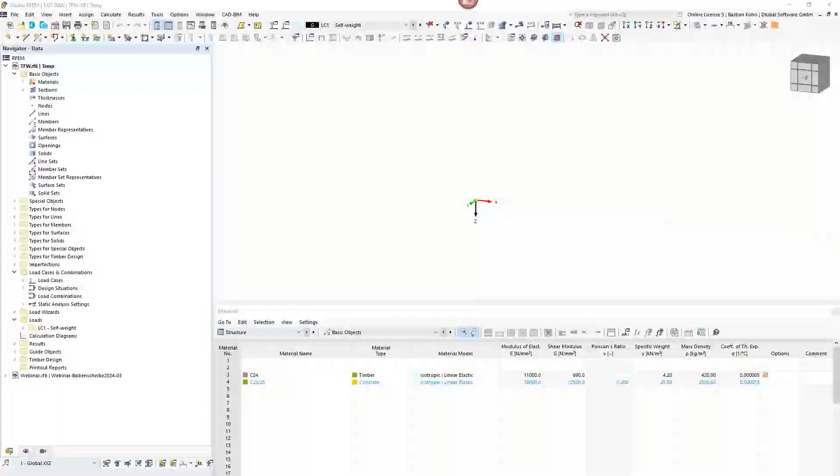Just have to get the right one. This one's the right screen. Oh, I have to click share. Sorry. Yeah, looks quite good.

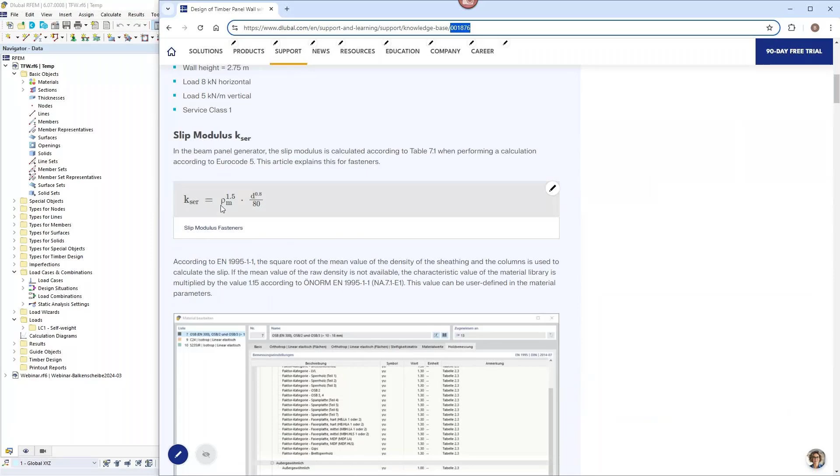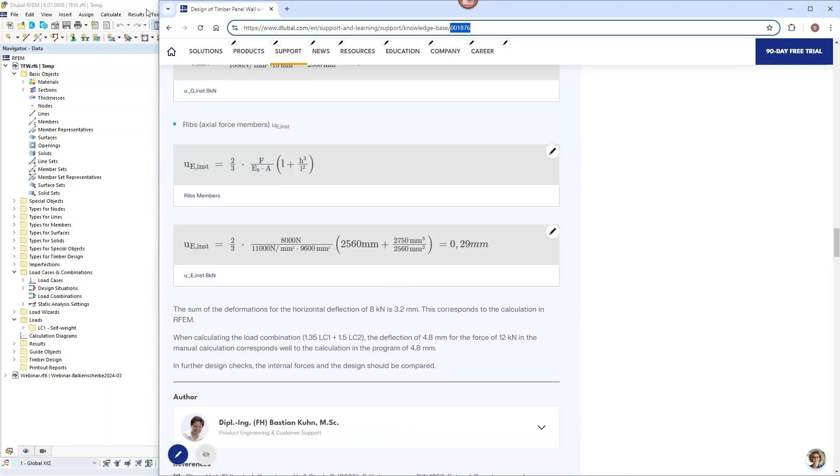Okay, before I start the modeling of this timber frame wall, just as an information for you, my colleague probably will share the link also with you. The model I'm doing here has been analyzed and calculated also by hand on our knowledge base. You can find it by the number 001876. And here you can see the formulas that are lying behind it, and also the deformation. And of course, the inner forces are calculated here with hand formulas or equations. Maybe once I've generated the model, I will take a look back also to the homepage just to show you what we are doing here.

Okay, before we create the model, we have to give a model name, timber frame wall. I will choose type of model 3D here. Then in RFEM 6, one of the advantages compared to RFEM 5 is that you have every design add-on completely integrated into the software, and it's not a separate add-on anymore. It's completely integrated into the software, which has a lot of advantages for speed and also design purposes.

And so I can decide what I want to build or to plan in here, and what we want to do in this first simple structure. I mentioned it already, we will create a beam panel. Therefore, we would need the multi-layer surfaces add-on. We don't need the load wizard. We also don't really need the combination wizard, but it does not matter. And we will do the timber design in the timber design add-on.

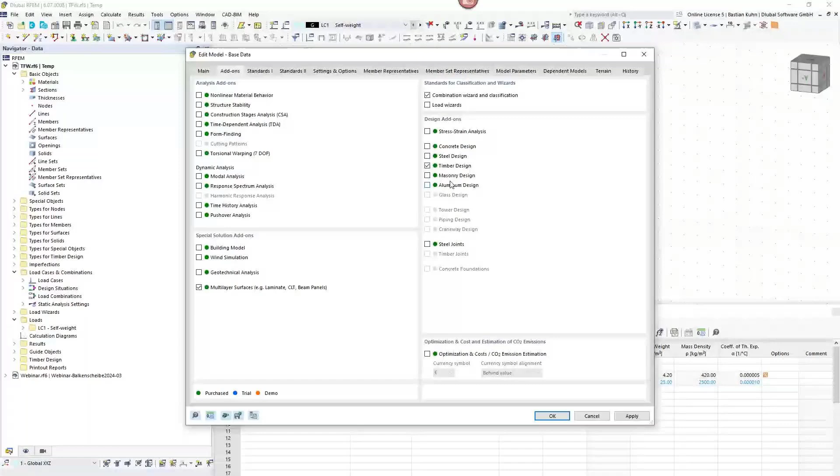Looking at the third register in the basic data, we will have the standards here. We are calculating according to the timber Eurocode, and of course it is also possible to calculate according to American standard, Canadian, and a whole bunch of others, even Chinese is possible for timber design. We will choose timber design with all the national annexes that are available for Europe. What is possible: America, Canada, Switzerland, Italy, because it has some special rules related to Eurocode, but different a little bit. There's Chinese and there's Australian standards as well. Okay, all the other options are not relevant for this

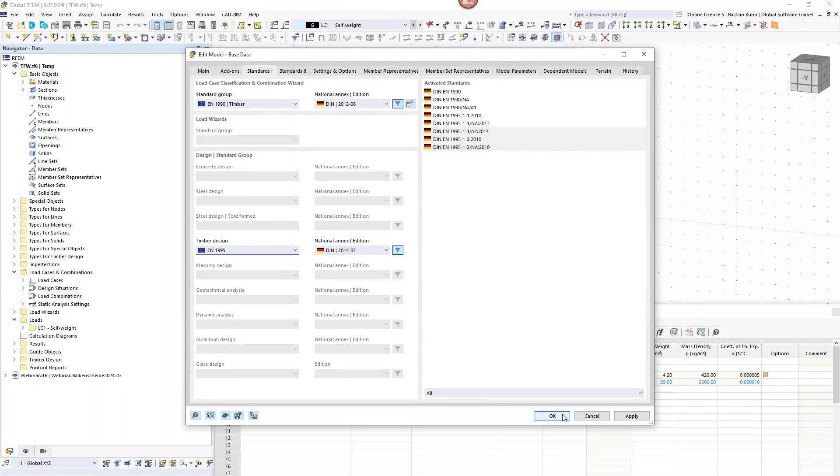quite simple model. Okay, we start and we will create the surface or the wall, and therefore we create a new thickness. For starting, similar as, I don't know if you ever worked with our software, but also when you created a CLT wall or floor, cross-laminated timber, you can start with just a concrete material.

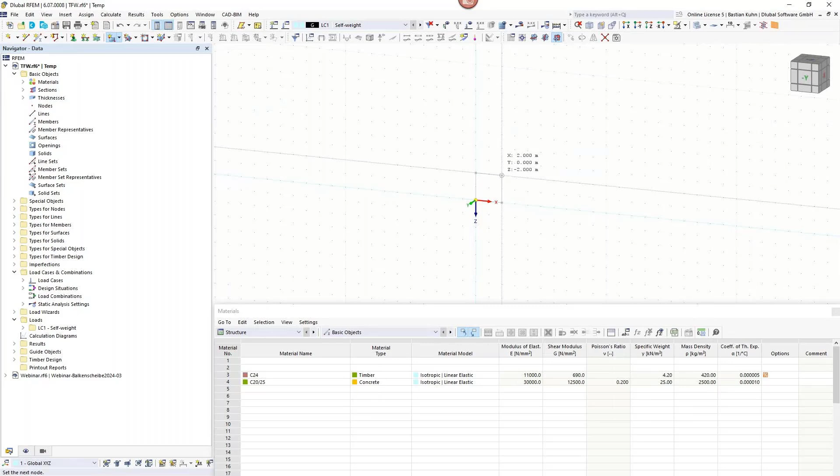That's what I'm doing here. Any kind of thickness, that does not really matter. Just create it just for drawing the structure and how it's going to look like. So it has a size in X direction of minus 2.56 meters. This is now a theoretical example, and I chose this distance of 2.56 meters.

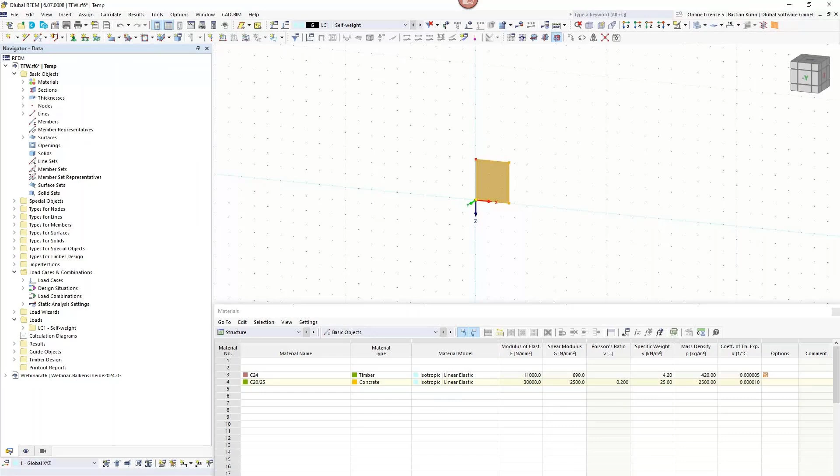I can maybe also add a little dimension line just so that you see it here, maybe in the other area here. Of course, for timber frame walls, you have a standard distance of each beam in the panel of 0.625 meters, so 62.5 centimeters, which is the standard design.

In America, with the inches, it's a little bit different, but once again, we're doing this here according to Eurocode. I will show how to change it also for the relevant parts of American standard, but the main purpose here is Eurocode. And just to get back to the homepage again, here the hand calculations are also based on the Eurocode.

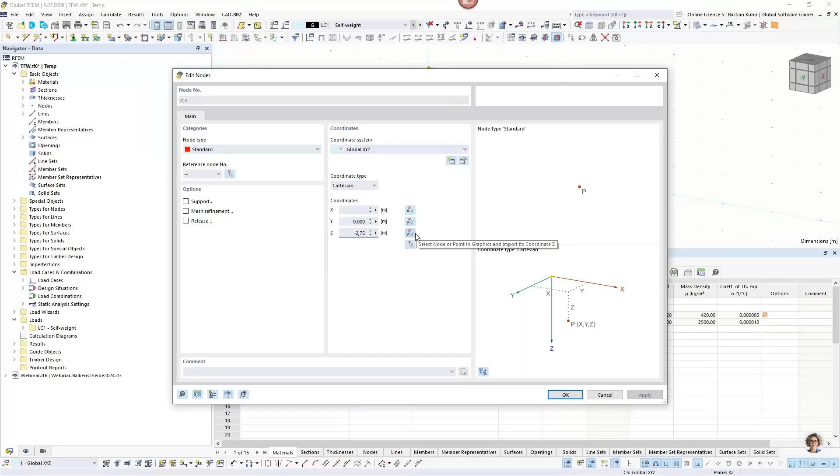Okay, and to see it maybe in this picture, because of the distance here, I get exactly 5 beams side by side in this structure. Okay, just as an explanation if you ask why I chose such a distance here. Okay, I want the height, also a more European standard value, of minus 2.75.

Then I will add supports, and the first support should be not movable in X, Y, and Z direction, and also no turning, because it's in this case a 2D position, and I will put that at the origin in order to keep it statically determined. I will also just move one support on the right side. In the bigger model that I'm going to do just after this simple model, of course, you would do a complete support underneath the wall. That's for sure. It's just for this first example here.

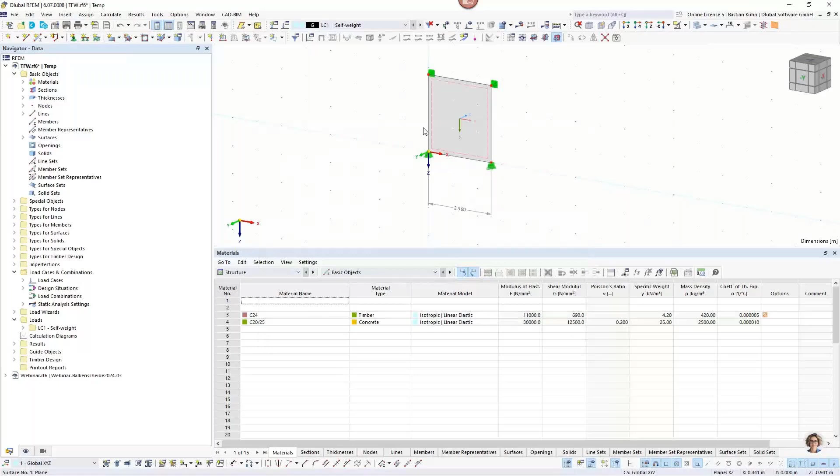So this one is moving, okay, and so that it's not flipping outside of the plane in Y direction, I will define the translational degree of freedom in UY direction. Okay, I will put a line load for the first load case of a value of 5 kilonewton per meter, and go to load cases and combinations and create a new load case for the wind. I deactivated the self weight just so that it can be compared to the calculation by hand.

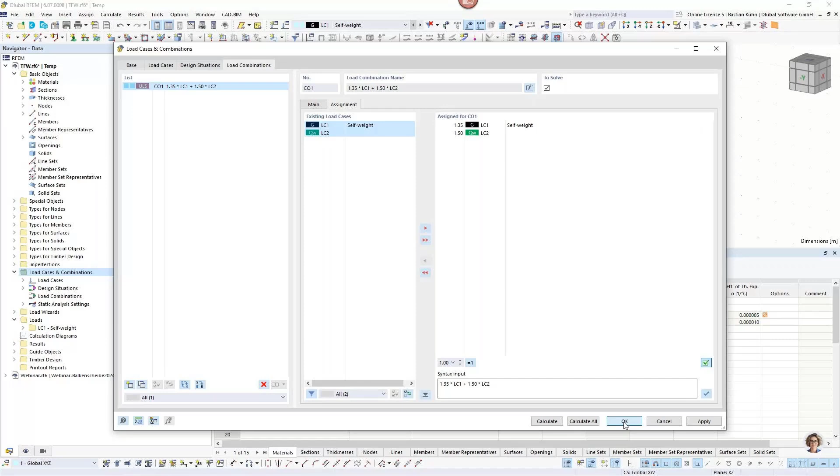And here's the wind, and I'm directly assigning a load combination in here manually. That's what I mentioned at the start, that I don't even need the load combination wizard here, as I'm just typing it for this simple model. Once again, in the bigger example right after this, we have used the combination wizard. Okay, just typed it, and then it's there. So this is the combination that we are designing.

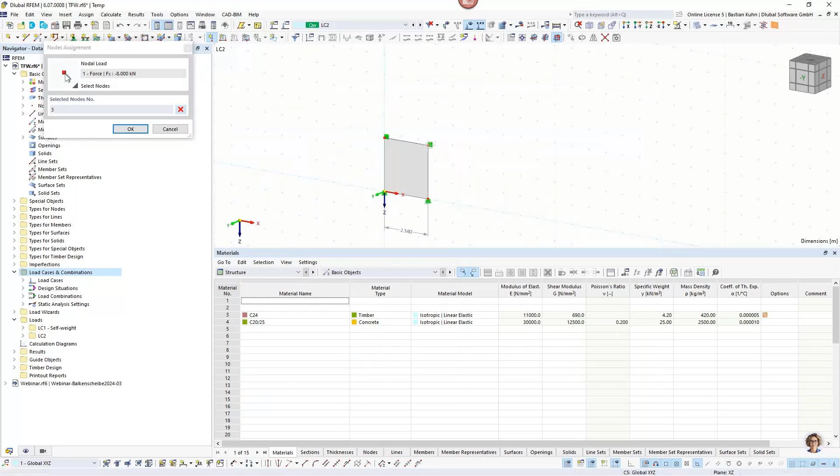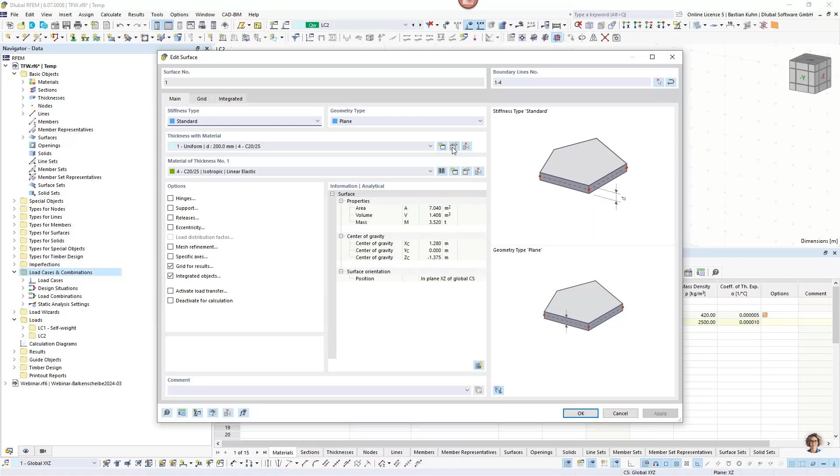But of course, I forgot to define the horizontal load from the wind. This is going to be a force of 8 kilonewton, and it goes in x direction and minus, of course, because I want it to be moving in this way. Okay, but so far this is still a concrete wall, which we don't need. And how are we going to change it to a timber frame wall? We double click on the surface, and we edit or create a new thickness. In this case, I'm choosing edit this thickness.

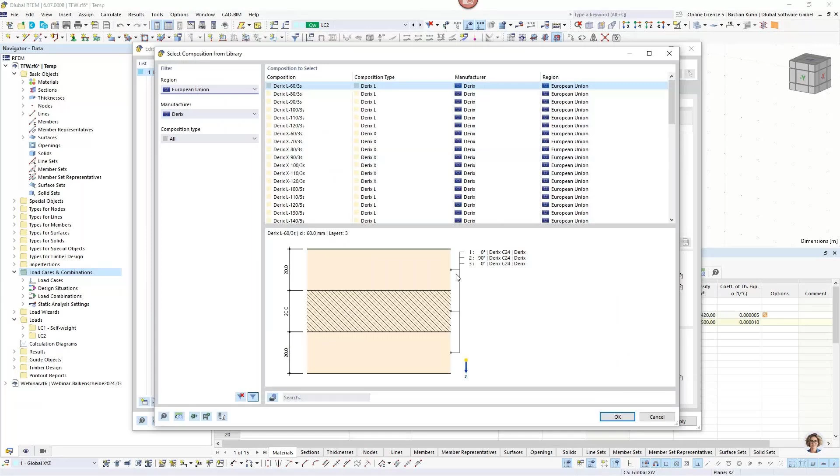And now that I've activated the multi-layer add-on, I can choose here the layers. If I wanted it as a CLT wall, then I would have done it this way. But in this case, we want a beam panel. So that's the thickness type for the timber frame walls. Not even pure timber frame walls. You will realize it when I'm in the material database via this library book in here.

So now it's predefined OSB according to either American, Canadian, or European standard. For our example, we would use 10 to 18 millimeters OSB. But if you use the drop-down button in here, you can also use gypsum, for example. Yeah, even for timber floors, at least here in Germany, what's used quite often are the Fermacell gypsum fiberboards in order to stiffen your structure. So that's quite an economic way of creating your walls. So, yeah, I mentioned it here.

I would choose OSB. I can also show you, just as an imagination, how you would do it with the American standard. It works quite simply, similar to what you choose. I just have not switched my dimensions to inch, so for me it's rather hard recalculating the 0.5 inch, because thickness needs to be defined here additionally. So this is why we will probably better be choosing the European standard.

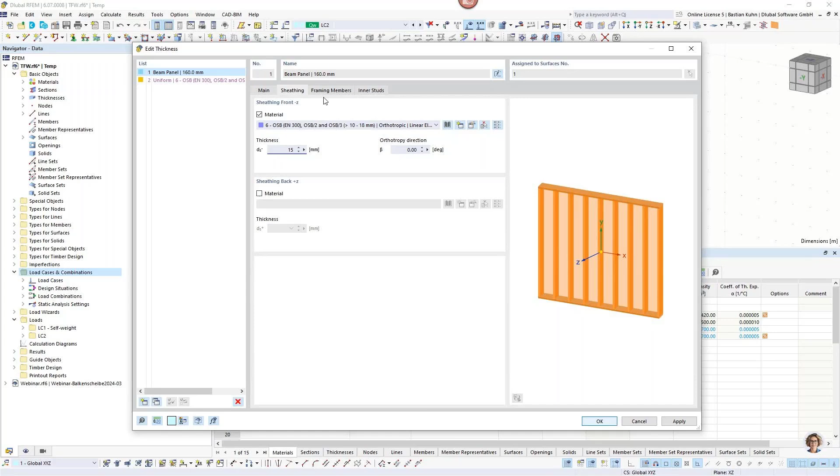For example, if you are using some insulation material, and this also has some capacity for stiffening your structure, this would also be possible to define. So the material can be different on front and back of your beam panel. Okay, so this leads us to the framing members. Here that's the usual material and section database that you can choose from.

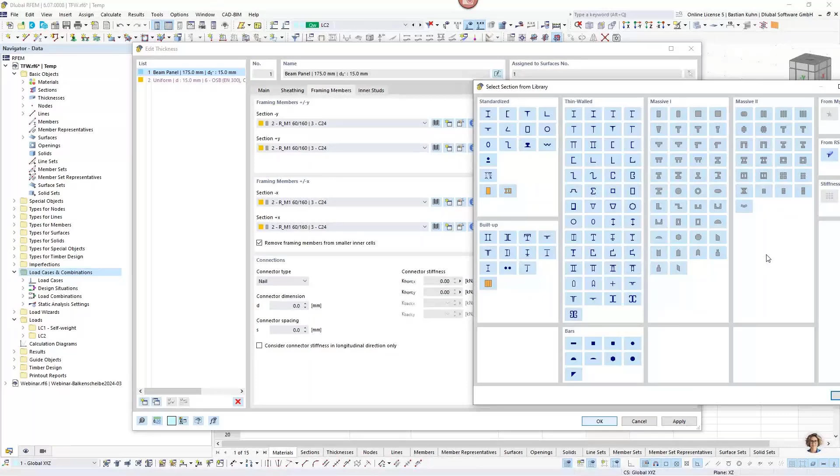Sensible, of course, is only the rectangular one here, but just as a notice, it is possible to choose and define any kind of section here. For this case, I'm using a 6 centimeter by 16 centimeter board or beam inside, and this is the most standard way to do it, and that's what I'm going to do for this example. These special selections I will show in the bigger 3D model afterwards.

Then you choose the connection type. You can have nails, staples, or user-defined slip in here. And when we choose staples, for example, with the dimensions of 1.5 by 50 millimeters, you see that the stiffness is already calculated in here. We're choosing a spacing of 75 millimeters.

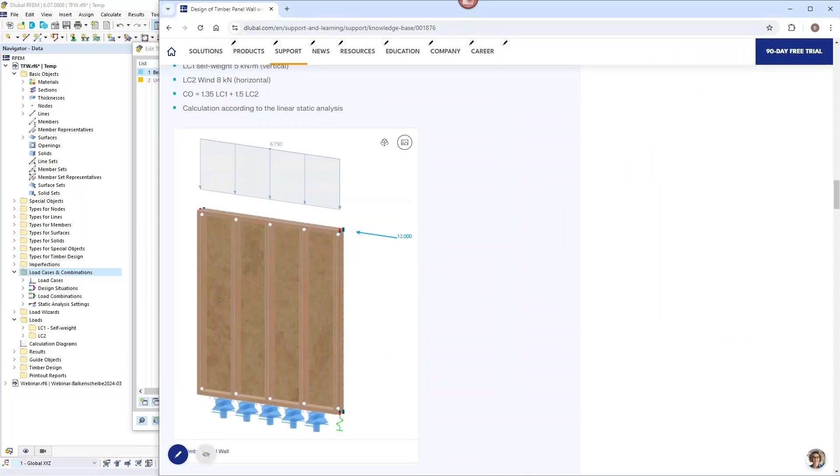And when we compare it, I hope it's the last time I'm switching to the homepage. If you look into this here, you see how these equations, or how these values, are calculated, with the slip modulus from the mean value of the beams and the planking. Okay, so this gives this value.

It would also be possible to consider the connector stiffness in just one direction. Then you have it just in X direction and the Y direction will be 0. I will also show what that means in the generated beam panel, so that's important info you should remember once we've generated the beam panel. The point I'm showing you here is that this is a generator to generate the timber frame wall in the big program RFEM.

Okay, then we have the inner studs in here. You can have other sections in here, similar to what I showed you when I was working in the framing members. It counts here vice versa. You can have IPE profiles if you want. For example, if you have a very high vertical load and you say, okay, in one special part I want an IPE, then you can create any distance in here, 1000 millimeters, for example, and create an IPE. So that would also be possible to define.

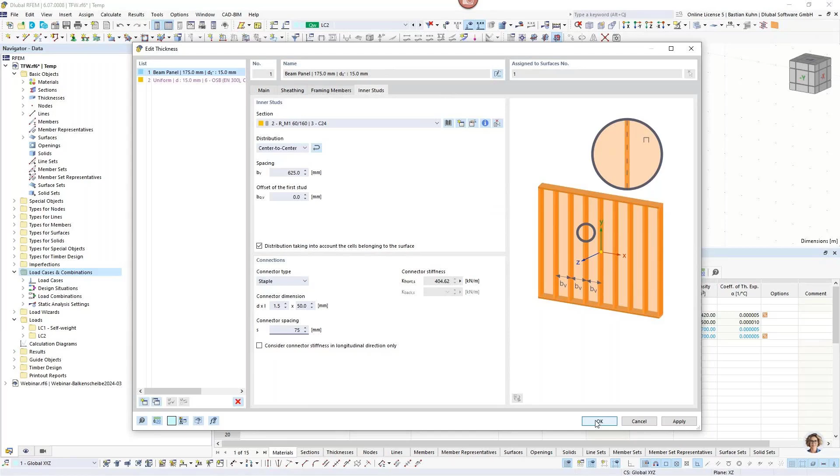All right, but for this example we are choosing center to center and the spacing that I already mentioned, 625. This offset and what it does, I will also show in the bigger model afterwards. Similar to the definition before, I'm choosing 1.5 and 50 in here and the connector spacing of 75 millimeters. Then I press OK, and one more time OK. So nothing's changed. Surprise. Why is nothing changing so far? The answer is because I have not shown the beam panel.

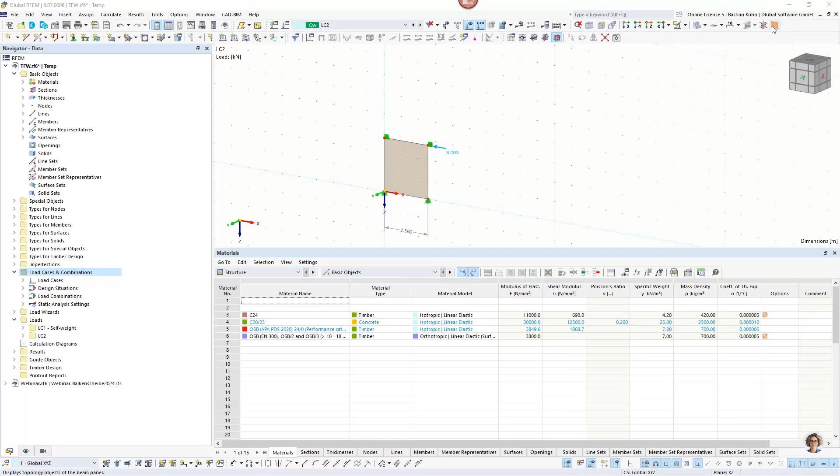Our idea for developing the beam panel is that you work with surfaces, as you know them, and then inside them you generate the beam panel. And when you now activate the beam panel, you can see that it's generated in here. So here is the top beam and the bottom beam, and also the posts. We have 5 posts in here, obvious because of our distance. I can maybe switch on photorealistic visibility just to give you a better imagination of what it's doing.

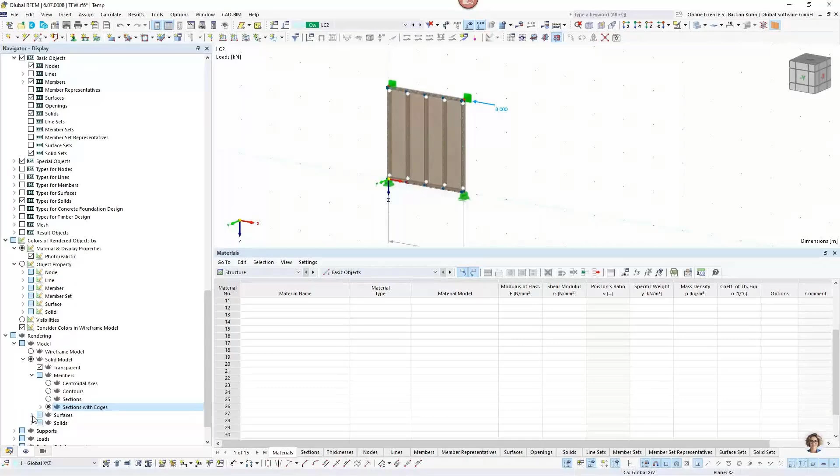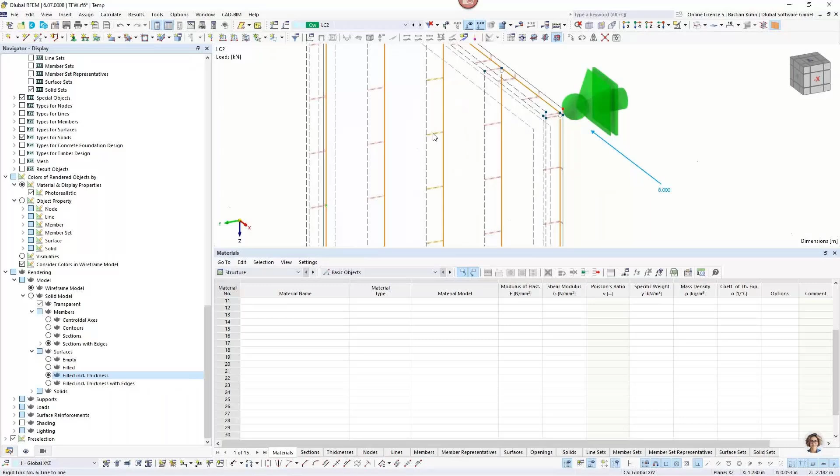I hope that can be seen this way. So you see the OSB is eccentric, moved to the outside. I'm switching the rendering off. It is connected with these little pins in here, which represent the staples that we have in there. When we double click on one of those pins, you can see that there's a rigid link defined, and it contains the stiffness that we generated in the beam panel.

I promise not to show the homepage anymore, but I'll do it just one more time because it's good to have it seen in here. If you remember, I had defined a spacing of 75 millimeters, calculated on 1 meter, which gives you 13 connectors. 13 connectors via the calculated slip modulus gives us this value in here, and this is done here. I also told you we should remember this longitudinal stiffness - if I had chosen just to have the stiffness in UX direction, my UZ value would be 0 in here. So that would also be possible.

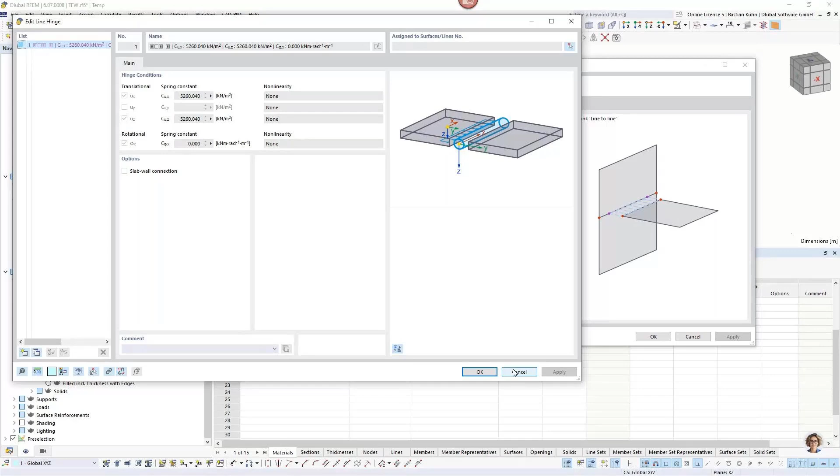Okay, this is the generated hinge there, and it's generated once again between each beam and the OSB planking. I will put on the rendering again. So here this way, it's probably a better visibility.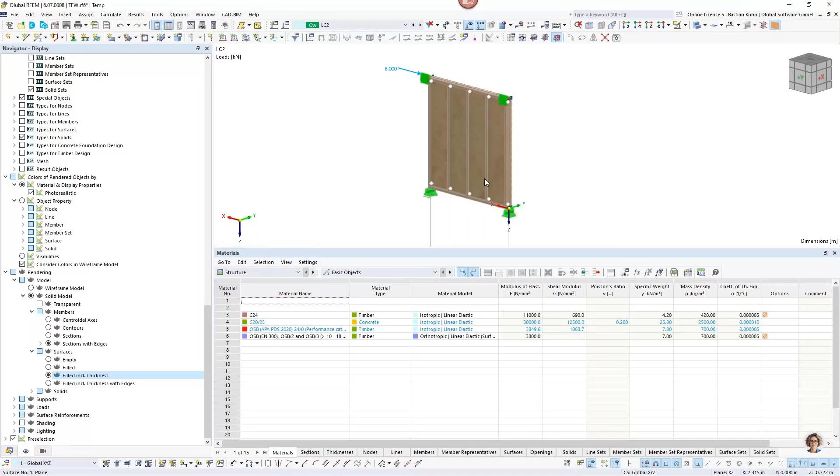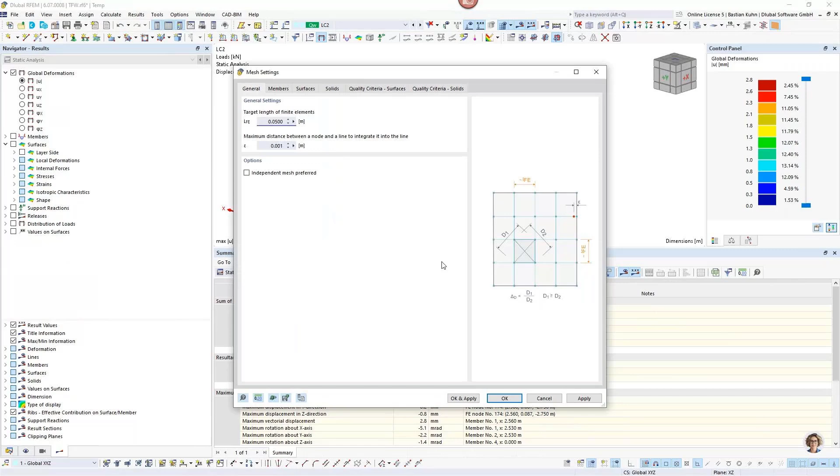Okay, so now we want to see results of it. Of course, I did not mention the FE mesh - that is something we should have maybe looked at before, but we can calculate it once again. I will get the rendering off, and you see that the FE mesh in this case is nonsense. So we have to go back to the FE mesh and make it a little bit finer with 5 centimeters, which is maybe too fine, but for this example I think we can do it just to compare our deformations and inner forces.

And maybe also the reaction forces, because actio should be reactio - that's what I learned in my studies.

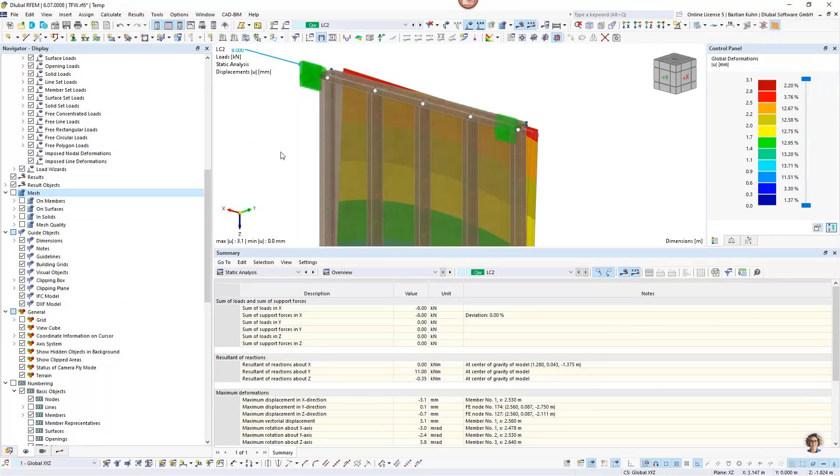All right, so you see that the FE mesh is now fine, maybe too fine, but it's good - we will leave it this way. And we have a deformation of 3.1 millimeters, and reaction forces - actio, reactio, that works. We have a little bit, because of the eccentricity, small forces here, but I think they can be ignored in this case, which gives us a little bit of changing inner forces, but not that much.

This is the deformation that you would also calculate by hand for this simple formula. And then now it's actually done - you have the stiffness correctly assigned, so that's all working.

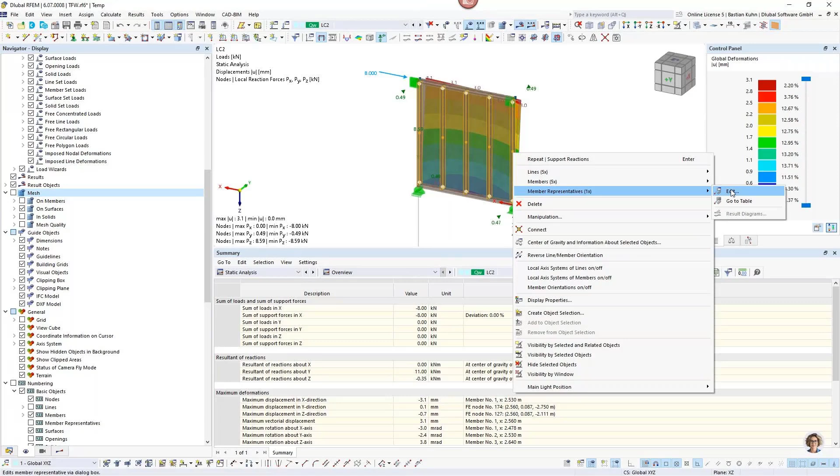Of course, we did not design the timber frame wall. So how would you design the timber frame wall? This I can also show you via our new - well, it's not new, but in RFEM 6 it's new - the so-called member representative. So if I'm choosing here member representative for the posts, and what do you verify for the post? The buckling, of course.

The advantage of the member representative, in case you have not worked with this in RFEM 6 and do not know this, is in former times you would have to choose all the posts and edit them and work on them. This is now not necessary with the member representative, because every member that is similar to the other one, which is the case for posts in timber frame walls, can be summarized in the member representative. So you just do it once, and in former times you did it several times. This is one of the good advantages.

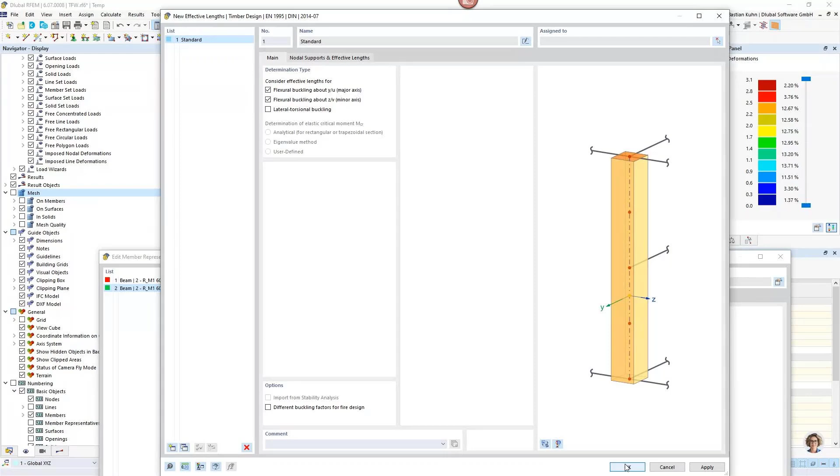And then, of course, effective lengths - we do not verify lateral torsional buckling. We even do not need to verify the buckling about the minor axis, because that is covered by the planking or by the sheeting. But just for sake of completeness, we are verifying it.

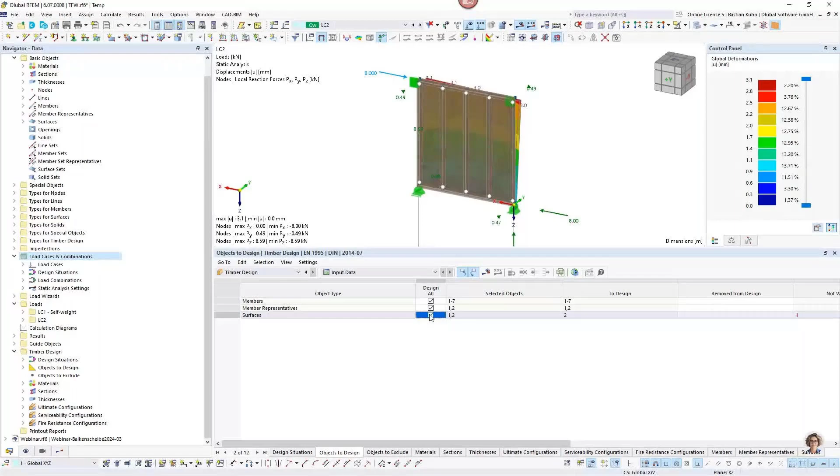Then we switch to the add-on timber design, which is right here in the drop-down menu. Once again, it's one of the new advantages of RFEM 6 that you do not have these add-ons here on the left side anymore. You have here the register timber design, but it's more about the columns because it's completely integrated into RFEM 6. Okay, what do we verify? We want to verify this member representative that I just showed you.

So that's member representative 2. And then we calculate it and look for the results.

As I said, what we want to verify here is buckling. Pressure against lateral to the grain for the downstand beam is also possible, but it requires the definition of an additional beam. That's why I'm skipping this here, just as information in case you ask yourself this question. You see stability works in both directions, and we are very proud about how these verifications are shown now.

Here you see that all the equations are there with nicely written formulas, and of course you get the slenderness ratio and the buckling factors, and this can directly be put into the printout report as your documentation of the results you've calculated for the posts.

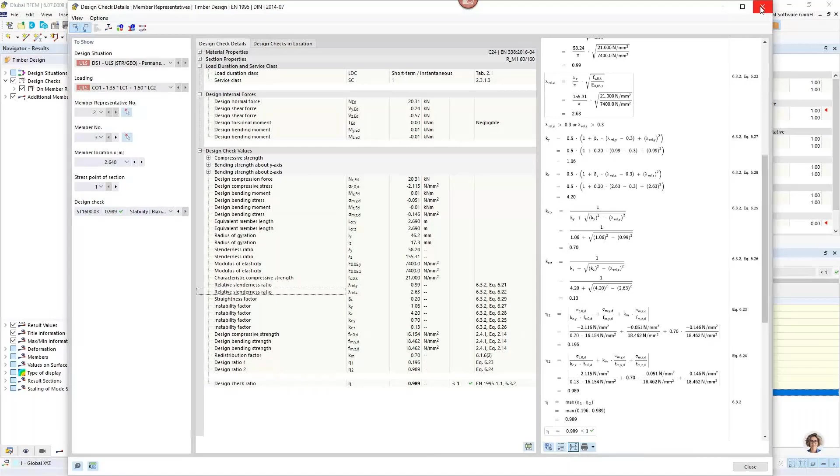Okay, the connections inside it is something which is also the most important verification. It must be done by hand, but there are methods and ways that help you to calculate it.

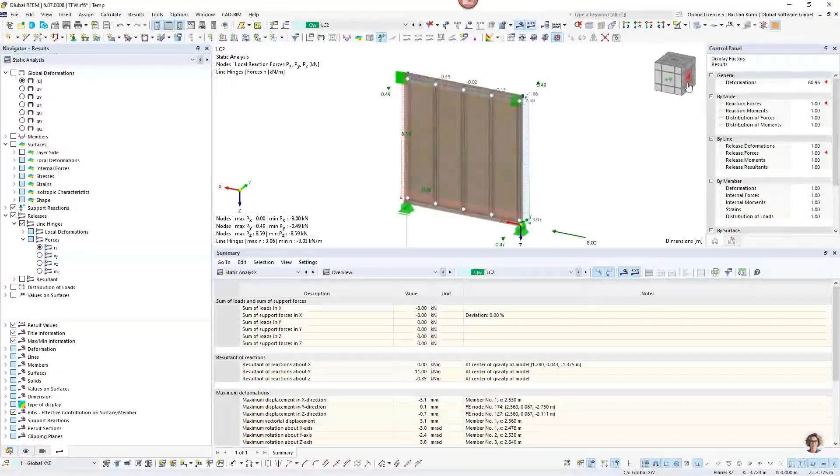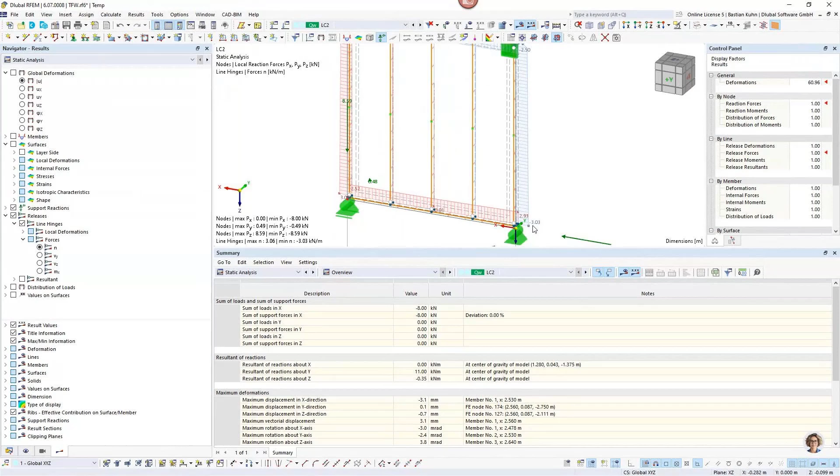You can take a look into navigator results, static analysis, releases, then line hinges and forces. We'll switch off this one and also the rendering once again. In the middle, there's nearly nothing happening, it's rather a constant value. To be very much on the safe side, you would calculate your load bearing capacity of your staples in this case, and compare them with a value of 3 kilonewton per meter, or you could also take the middle value of it.

This is what the software gives you, and we're also working on designing them. Of course, this will also be possible quite soon.

Okay, this is the simple model. In case there are no questions unanswered...

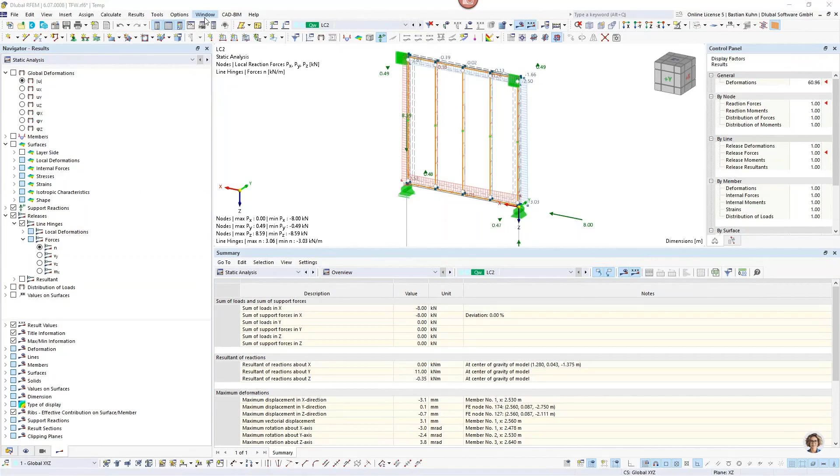There is a question, what about the possibility to add openings? Yes, that's what I'm showing you now in the bigger model. That's a good question and leads us to the bigger model. Therefore, I'm closing this and switching to the bigger model.

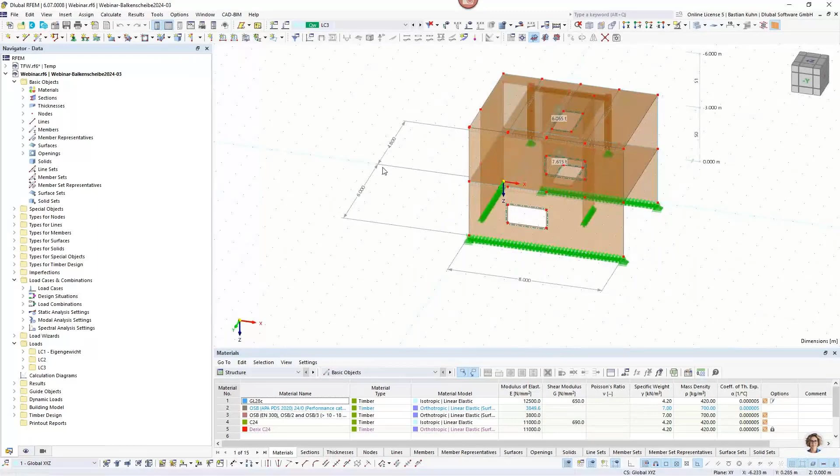It is a house that I've probably shown here for 10 years or so. If you take a look at the historic structures, this is something I've probably shown 10, 15 times already. It is completely made from CLT. Here it has a little balcony. It has a length of 8 meters, width of 10.8 meters if you include the balcony outside.

All the CLT plates are connected with hinges here, and also here on the wall they are connected with it, not the surface. I wanted to take a look at the line hinge. Here's one here. There should actually also be a slip in the X direction, similar to what I showed you in the smaller model before.

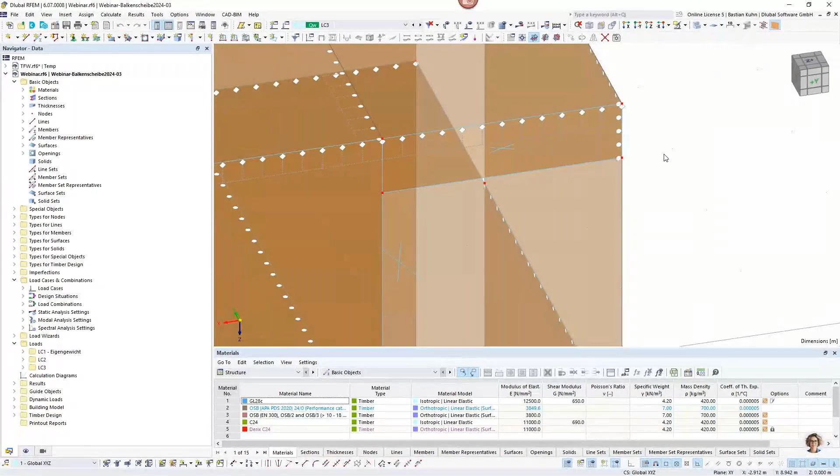Then you get the forces in the line hinge and have to compare them with the load bearing capacity. Now this CLT building has openings here, of course, and I want to change this wall and also the inner walls into a timber frame wall.

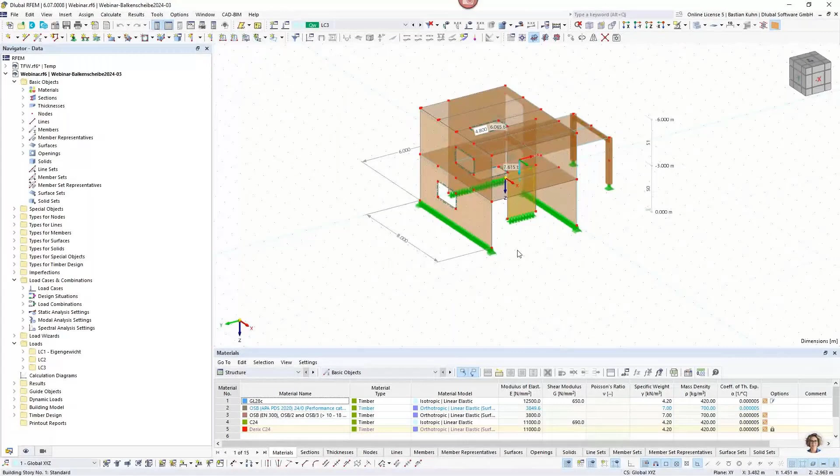Before doing this, what you would have to do in order to regard the opening is separate this surface into several surface cells. For this, we have a new function called extend trim line to next member line.

So we say okay, and then you see that it's divided here, and now I have these surface cells. Surface cells are quite a new object in our software, useful across a whole bunch of elements in the software, and we are using it now also for the beam panel.

You probably know that, at least when working according to Eurocode, there is for the timber frame walls a simplified approach according to chapter 9.2.4.2a or something like that. Don't quote me, I'm not 100% sure which chapter it is, but it's 9.2.4 something. And this is for a hand calculation.

And what would you do when you calculate such a structure by hand? You would calculate your horizontal force, and then say, okay, this surface cell will bear this horizontal force, and this surface cell will bear that, and I need hinges here and here at this point, and I'm totally skipping the elements in here.

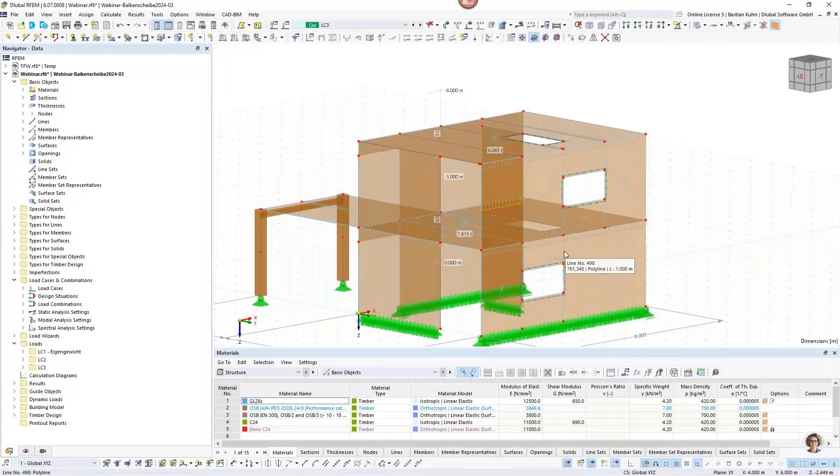I will generate the beam panel right away, and then mention a few more points about what you could do here. Maybe I would delete this one and divide the bottom surface on one point, just to show you what you can do regarding slip, and where the difference is to the top, where I'm still having one continuous surface. So I go right click and say divide surface with intersecting lines, and now it's divided. I'm just doing it on one side for demonstration purposes.

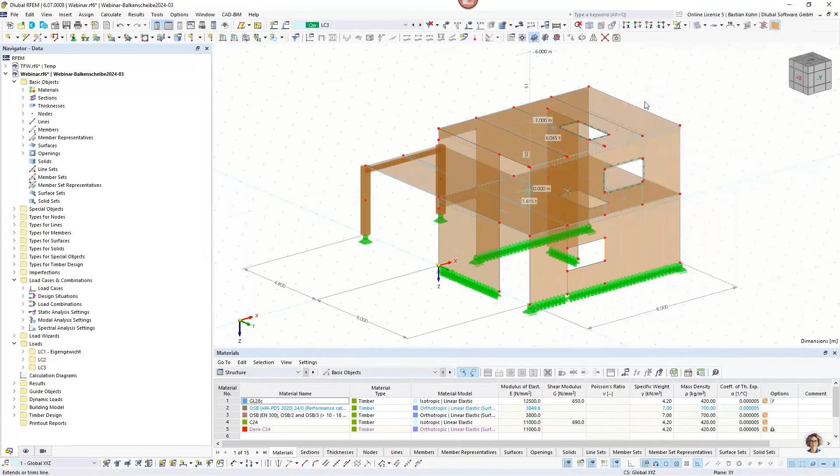So extend via copying - here I'm leaving the cells. I'm quite curious what's coming out of this, because I've never tested it before.

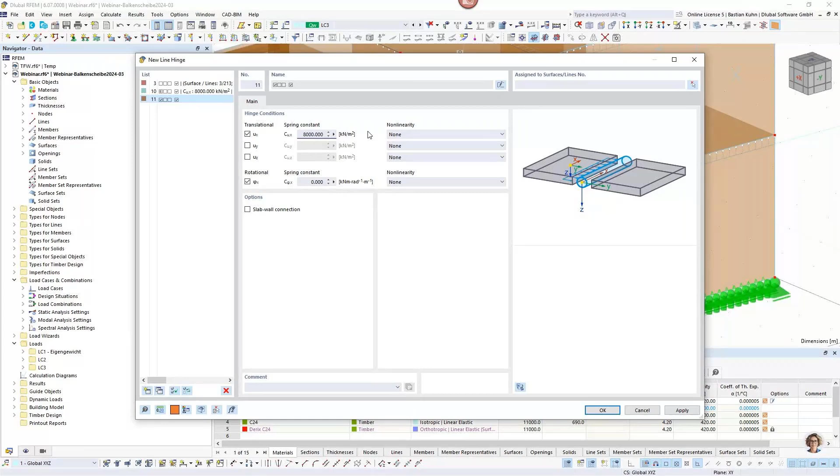I will insert now an object line hinge dialog box, give it also my favorite slip of 8,000 kilonewton per square meter, and say okay here and here - and here I'm having the slip. That's quite similar to what I've done on the walls, on the CLT walls. Okay, I forgot to mention the load, by the way.

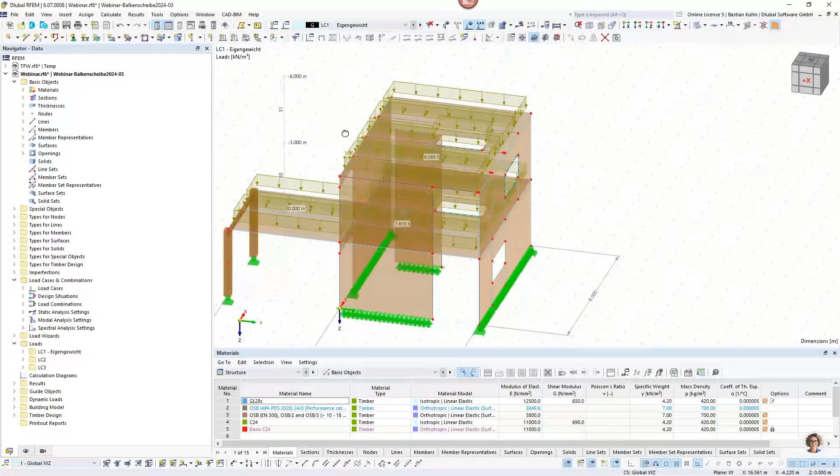So we have self weight here, quite simple, 1 kilonewton per square meter over the complete balcony. In load case 2, I have 1.5 kilonewton per square meter. In load case 3, I have generated the wind load blowing on the building from the front of it - that's where I'm stiffening out my structure, just for your information. Of course, I choose an automatic load combination and generated all these load combinations we are using here. Okay, so a lot of words I said.

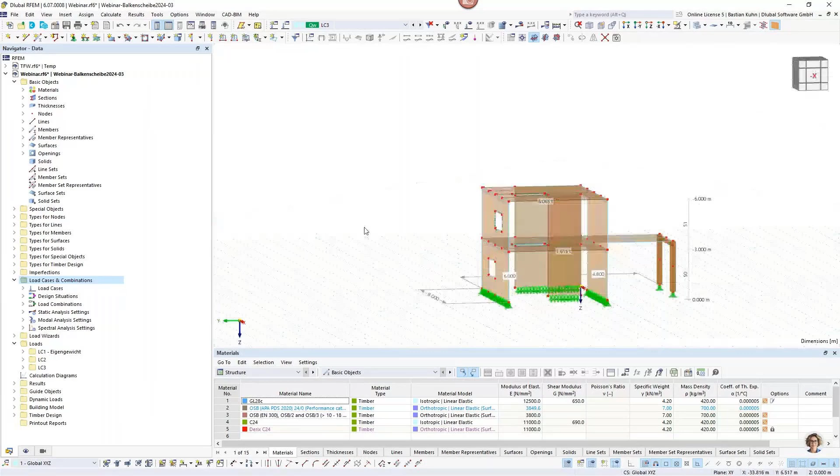Now I can go and display our relevant walls, these ones, and go into the selection and define edit surface, and choose the beam panel we just defined.

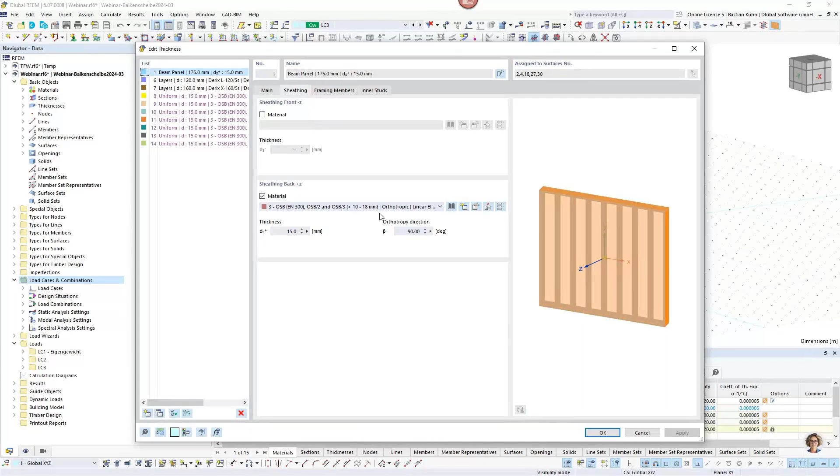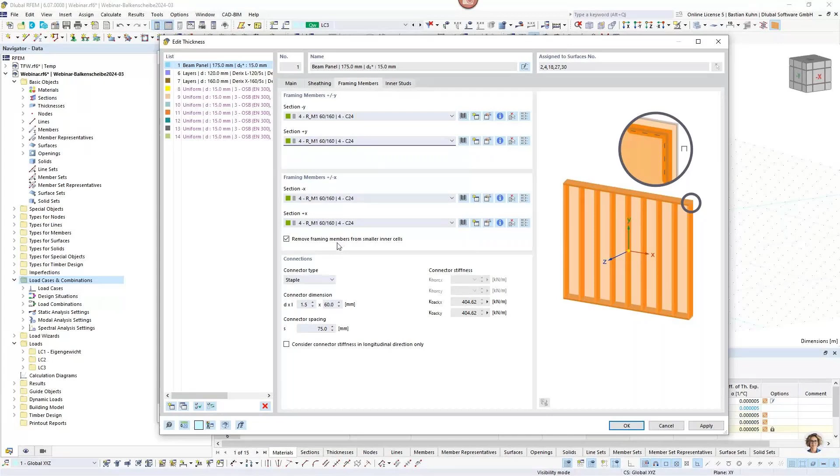I will go to the dialog box. Once again, I've changed the sheathing on the other side, but it is quite similar to what we've done before. Framing members are the same. We're using also staples, and I'm keeping now the removing framing members, and also the distribution, and this offset here is by 0.

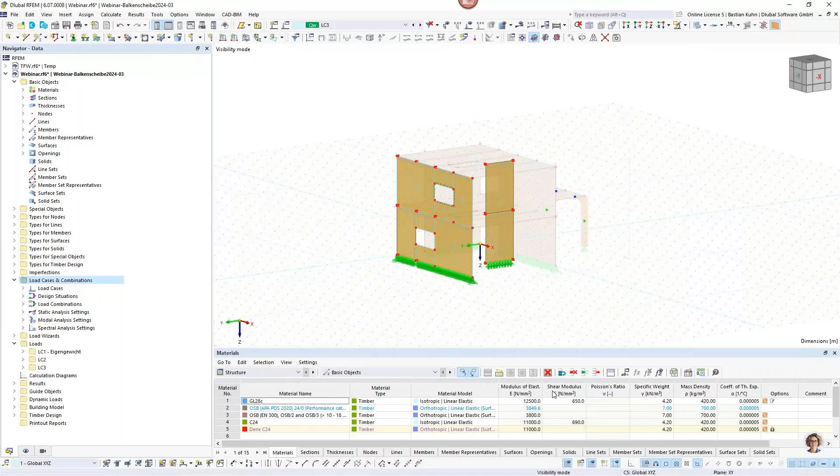So then I'm generating it and press OK. And then you see that this one is generated here. This one's not there - there was a small problem. Yeah, I should have...

Sorry, no, it's not working because I have not divided it. Okay, I said I would be curious what's happening because I never tried it. I probably should have tried it - then this would not have happened.

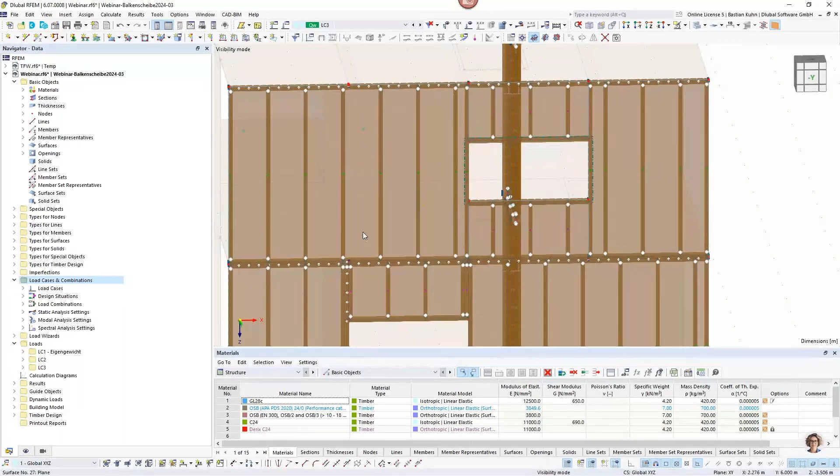But anyway, okay, so now we look at the top floor, at the top wall first, and we see that the distribution of the beams and posts is quite good. We would calculate the opening, and it kept our spacing of 625 millimeters in between, and here we have a middle value of 100 millimeters left, which is also good because we can still get insulation into it.

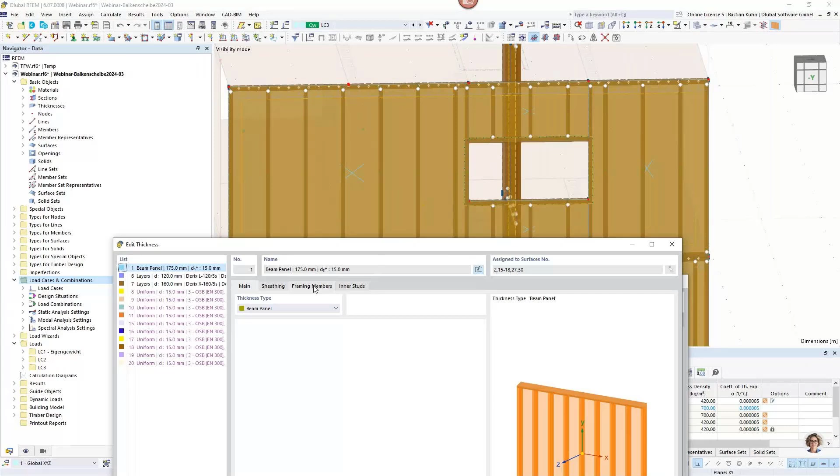But yeah, what I wanted to show you is what this special selection does here. So if you remember this, this is a post coming down here, and if you do not use the remove framing members from smaller inner cells option, choosing apply, then you would - I hope it can be seen because it's highlighted now - see there's now an additional post which makes no sense. So this is actually what this selection does here.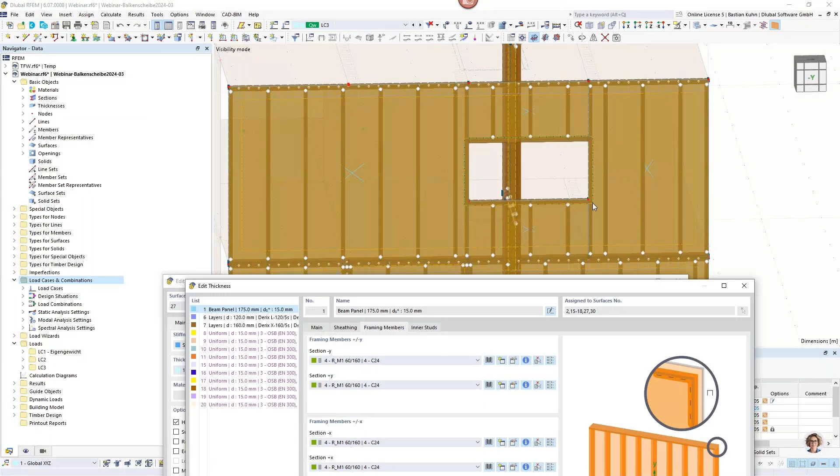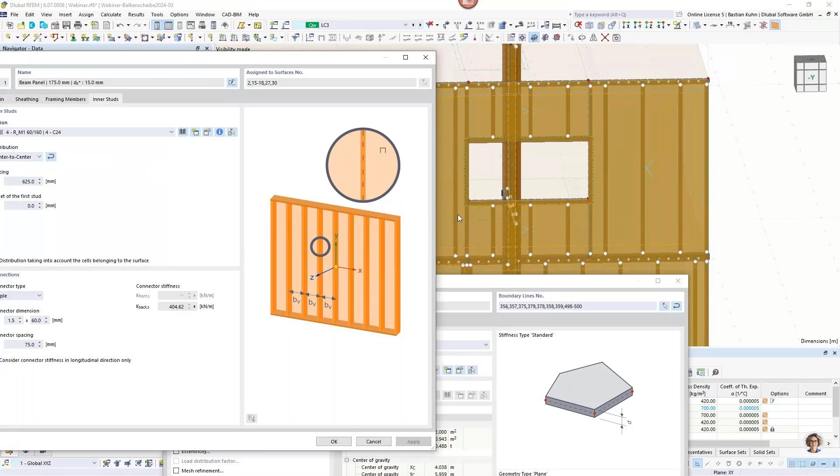And in case it does not fit, or you want a bigger distance here beside this, you can have this offset for the first stud. Once again, here I don't think it makes sense, but if you want, you can choose it, and then you are moving the first stud by 6 centimeters. Wait, maybe I will do it like this. It can probably be seen. So this, and we go apply. So you see here I have now 6 centimeters less. And then I can put, of course, more insulation. This is how this works and how you can assign that.

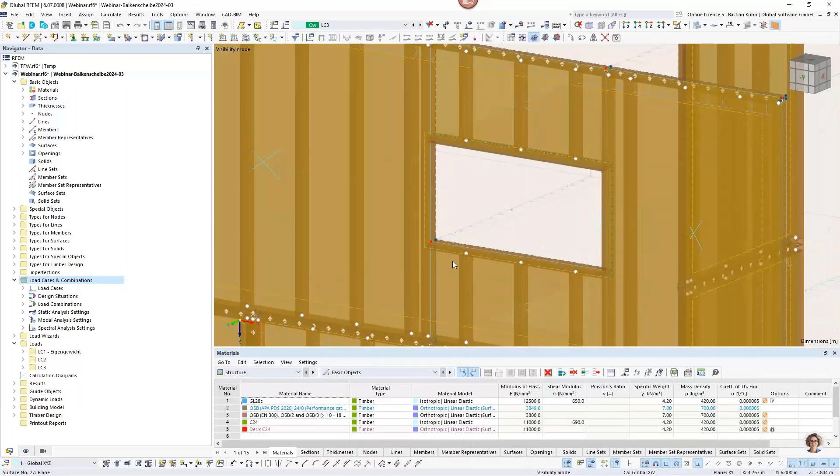Okay. Now, when we talk about openings, the point is, in Europe, I don't know how it is all over the world, but in Europe we have special rules for what you can do on such bigger openings. Maybe you also have a complete door that's going to the bottom, if you have a balcony here on this side. You can imagine hundreds of variations of it.

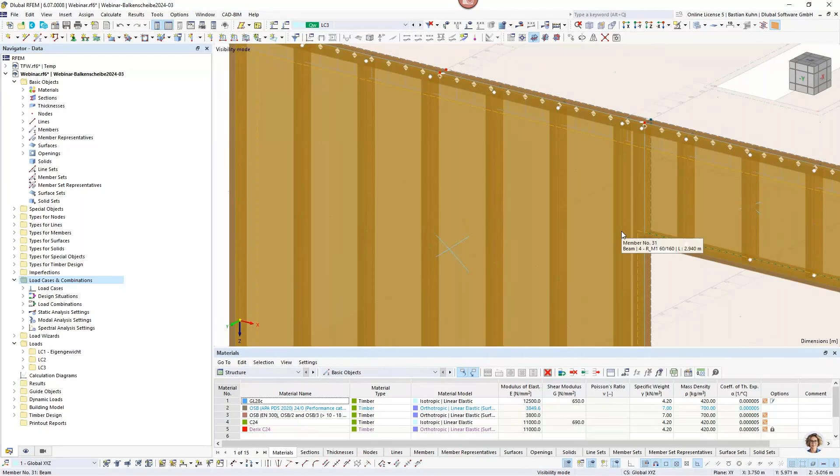What we do here in Europe is that we are using the top beam, or however you call it, on this window, and move it to the next stud. That's one of the possible constructions, and then it's completely shear stiff, and of course it's nailed on every part wherever our OSB plates are connected or coming together, and there's always a beam or a post behind it where it can be nailed on.

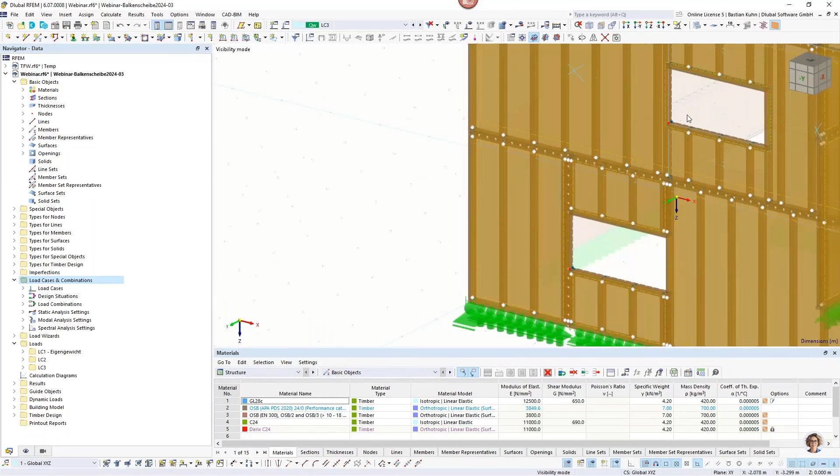Or what I did here in the bottom, and that's what I mentioned from the start: if you want, you can connect the beams, and then they have a slip in between. The slip is what I showed you in the first example, between the OSB and the post, and between those two timber frame walls. So that's the way it can be connected. It's maybe a little bit hard to explain, but maybe download the model and take a look at it, then I think it should be quite easy to understand.

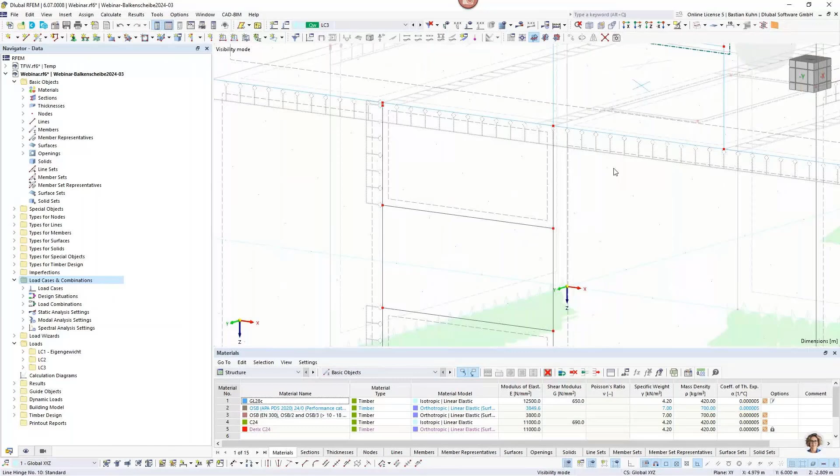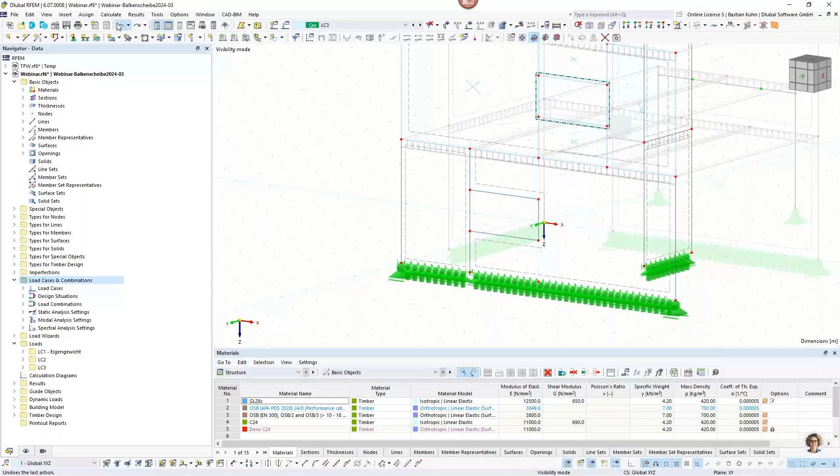Why is it not calculating? Just hold on. That's strange. Okay. Wait, maybe I will not get it going. Hold on. We will get rid of this. Maybe we will not divide it. Go in here, because maybe this was the reason for it. Okay. Yes, I know it's still intersecting. So in here, and now if we do it again, oops, was too quick, sorry. Up and here, edit, and choose again the beam panel.

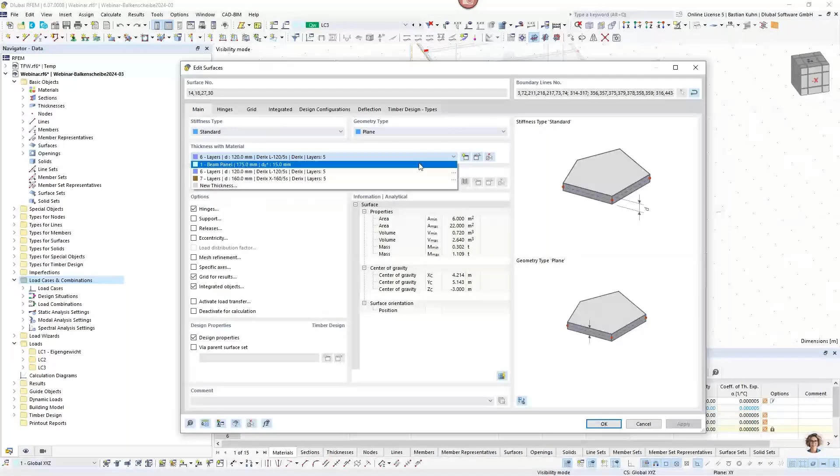Okay. Why is that now? Ah, so I forgot this one. So we need to extend here, one more try, otherwise I will leave you without the results of it. But I think it can work. Yeah, should be.

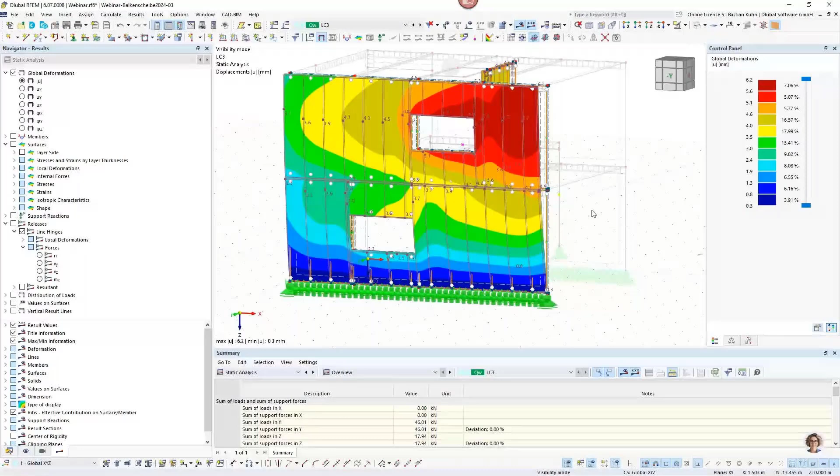Okay, it's not a really small structure, not even a big structure, but I also use the building model inside just to get my masses all around. So masses are maybe also a good point. One other advantage of using such a 3D object is that you can use the stiffness of the timber frame wall similar to CLT for every calculation. So also for your dynamic analysis, you can create response spectra and use it for this. And you see in here, this is now quite similar to what we had before. We have the deformation, we have the inner forces of the beams, and can do the verification on it.

Okay, that's it. That's all I wanted to show you. Quite a short webinar, I think, but 43 minutes was not that short.

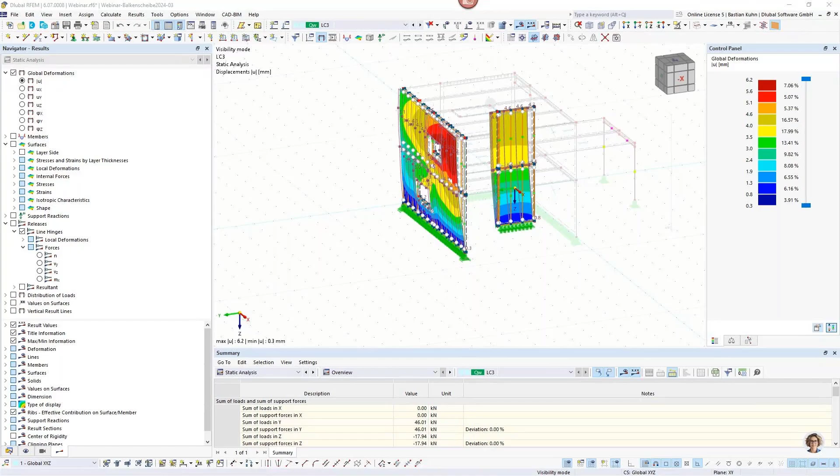I hope my colleague was able to answer all your questions. I'm not so sure. Maybe, Andreas, do you have something open I should mention? No, I answered nearly all the questions. Good. Maybe there are newer questions when I take over. Maybe you can answer the rest of the questions. Okay, I share my screen. Thank you for your presentation, Bastian.